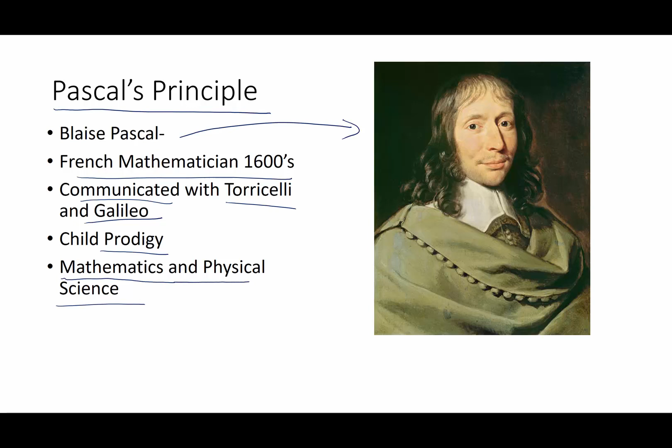Pascal was a child prodigy. He was so good at mathematics, he started publishing articles and things about math when he was still a teenager. And he was so advanced that a lot of people didn't believe that someone that young could actually produce something of that high a quality. But he had, and he produced a lot of great ideas in math and the physical sciences, meaning physics and chemistry, through the ages.

So we are going to talk about one idea of Pascal's, and that is the concept of Pascal's principle. Pascal's principle says this, and put a star by this, make sure you know this. The pressure applied to a fluid is evenly transmitted to every point within that fluid. Now, what does that mean?

That means that, let's say you have got a water balloon or something like this. If you squeeze on that balloon and apply pressure to that balloon, it is going to increase the pressure on every single point within that balloon, even the points that are far away from where you're actually squeezing. That's Pascal's principle. And there are lots and lots of applications of this, and we'll go into a few in a few minutes.

But first I want to describe a demonstration that was theoretically done by Pascal back in the 1600s. Some historians say this never happened. Some historians say it did happen. Either way, it's a brilliant story about science, so I'm going to repeat it. And it goes like this.

Pascal, like all scientists, had to have a way of funding his experiments. And so Pascal was being funded by the King of France. And every once in a while, Pascal had to show off a little bit. He had to prove to the King of France that what he was doing was worth the king's money. So Pascal set up a demonstration of his principle of transmitted pressure. He took a wine barrel, and inside of it, he inserted a long tube.

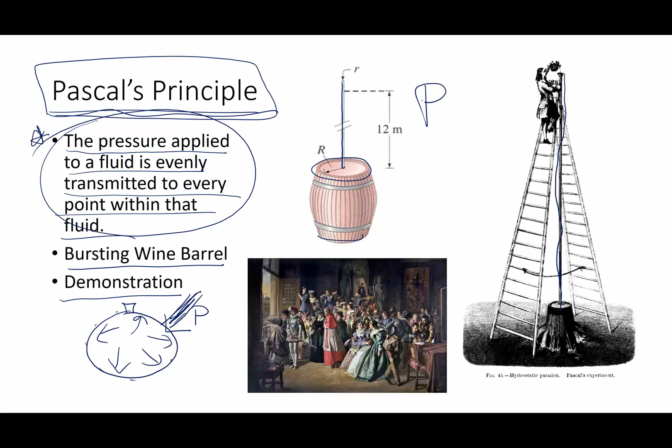Now, Pascal understood that pressure is related to the height of a column of fluid. So there's a direct relationship between pressure and height. So Pascal has this long tube, and then he has 1 additional cup of water. So he called up the king and all the courtiers to come around, and Pascal said, I am going to pour this 1 cup of water down this tube, and it's going to make this entire wine barrel burst.

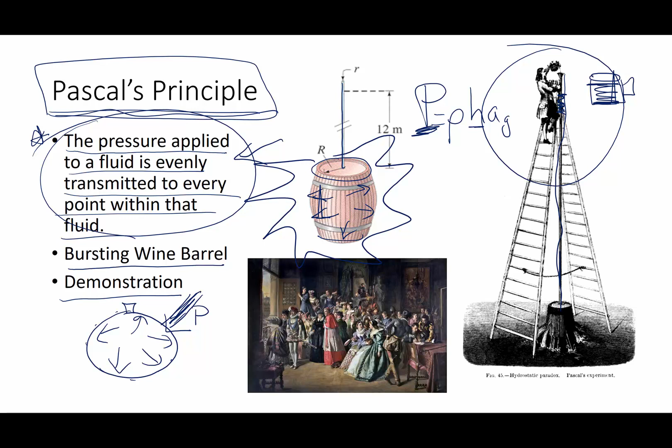And so he poured the extra water in there. It raised the column of water just the necessary amount. The pressure got big enough, and that pressure was evenly distributed to every point inside of the wine barrel. According to Pascal's principle, the wine barrel exploded. Everybody was amazed, clapped, and Pascal was the hero of the day. But that is a brilliant story.

At the end of this video, I'm going to ask you to watch 2 or 3 other videos of some of these really demonstrated in real life. So please watch those.

Here's another example of Pascal's principle. And these are your car brakes. Now, inside of the brake system on your automobile, you actually have fluid. You have brake fluid. It's a weird angle, sorry, but when you push down on the brake pedal with your foot, what happens is this pushes on a cylinder, and when that cylinder pushes on the brake fluid, according to Pascal's principle, the pressure is transmitted everywhere within that fluid.

So by pushing on 1 pedal here, you can actually apply a push to all these different areas within the car and make the brakes actually close so that your car will stop. Now, some of you have heard the concept of bleeding brakes. Now, if you have an air bubble somewhere in a brake line, what happens is liquids are not compressible. Gases are compressible.

If you have a cylinder in an automobile engine or something like that, and you have gas molecules, and you compress that cylinder and push it further down, what happens is the gas molecules become very close together and their density increases dramatically. That doesn't happen for liquids. So if you apply pressure to a liquid, the force goes in all directions.

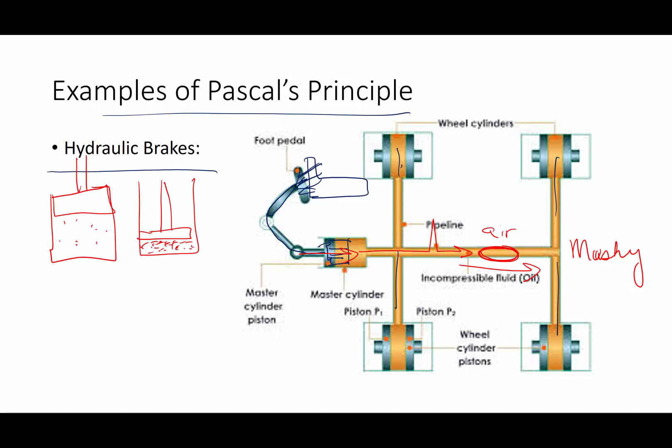Well, if you have pressure coming through a fluid and all of a sudden you have air, what happens is the pressure stops being transmitted. What happens in your car? Your brakes are going to feel mushy. And that's in the best case scenario. The worst case scenario is you're going to lose your brakes and you're not going to be able to stop, which would be very, very dangerous. So when people talk about bleeding brakes, what they're talking about is actually removing the air bubble and replacing the entire line with brake fluid.

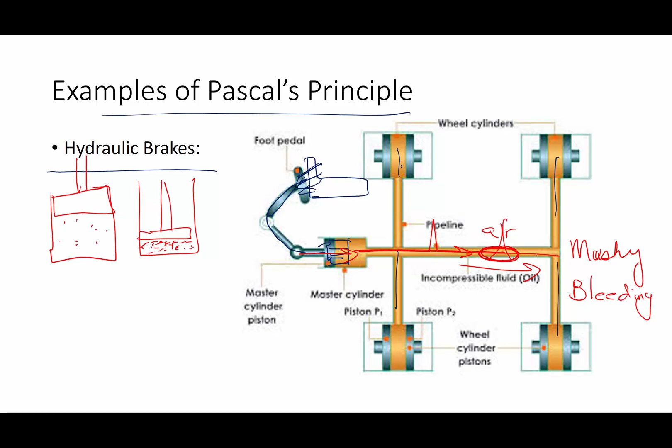Other examples of Pascal's principle. One is the famous beer bottle and mallet. So if you take a beer bottle, pop bottle, the cap has to be removed. And some people trying to be, I don't know, silly, will take one bottle, and if this bottle is open, they will hit one bottle with another and go bang. Well, if this bottle happens to be full of a carbonated beverage, you end up with a shower of carbonated beverage all over the place. And as I have had many a student tell me, that is a waste of perfectly good beer. So you don't want to do that.

But after your bottle is empty, and the top, of course, is removed, if you fill this full of plain old water, something not carbonated, when I do this, I like doing it with a rubber mallet. And if you try this at home, please make sure you're wearing safety glasses. Make sure you are wearing gloves, because you are going to get some sharp glass out of this. But if you fill this quite a ways towards the top with water, smack it, a good smack with a rubber mallet, not a hammer, but a rubber mallet. Some people can do it with their hand.

What happens is, because liquids are non-compressible, the push or the force goes all the way through the bottle, and because it hits the bottom, rebounds, and then goes back down and hits, it actually takes the bottom of the bottle and pushes it clean away. The force is transmitted through the bottle. Force transmitted through a fluid, that is hydraulics, and it is a fun and simple little demonstration of hydraulics.

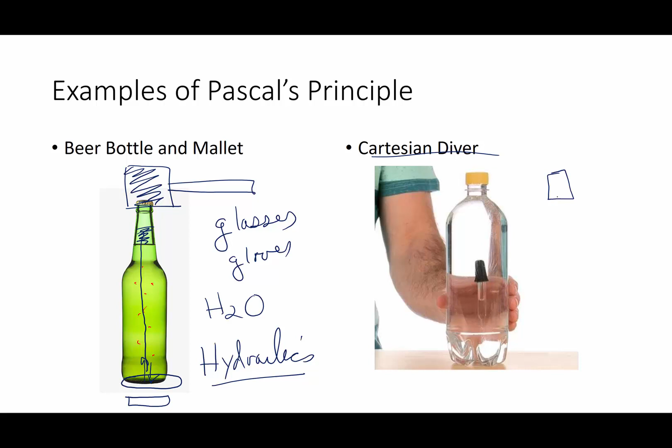Another example of Pascal's principle is a Cartesian diver. The simplest example is a 2-liter pop bottle with a little eyedropper in it. Put your little eyedropper into the bottle with just a little bit of water in it, and here's how it works. If you push on the bottle, now the bottle is full of water, the push via Pascal's principle is transmitted everywhere in the bottle, including up inside of the little eyedropper.

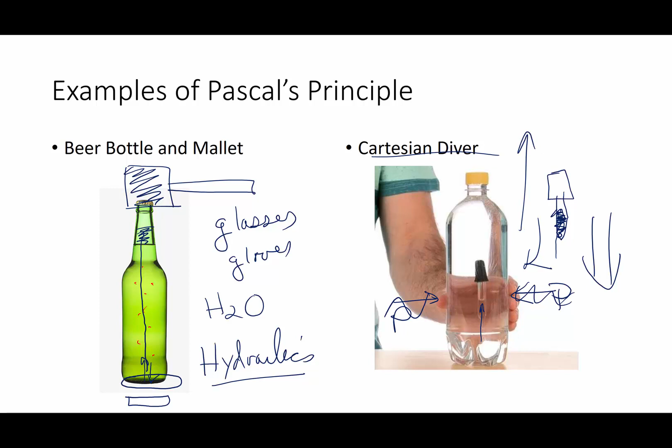So when the pressure goes up in here, more water flows up in here. This becomes more dense and sinks. When you release the pressure, the water flows back out again, and the little eyedropper pops to the top. Really, really fun little thing, but you need a 2-liter bottle and an eyedropper.

Okay, let's talk about blood pressure. Lots of cool things in fluids with blood pressure. Question: why do they take your blood pressure around your upper arm? Why not around your wrist? Why not around your ankle? Why the heck do they do it around your upper arm? Well, remember that the pressure in a column of fluid is related to the height of the column of fluid. In medicine, they're most interested in the pressure in your heart, and your upper arm is about the same altitude as your heart. That's why they want to take the blood pressure at that location.

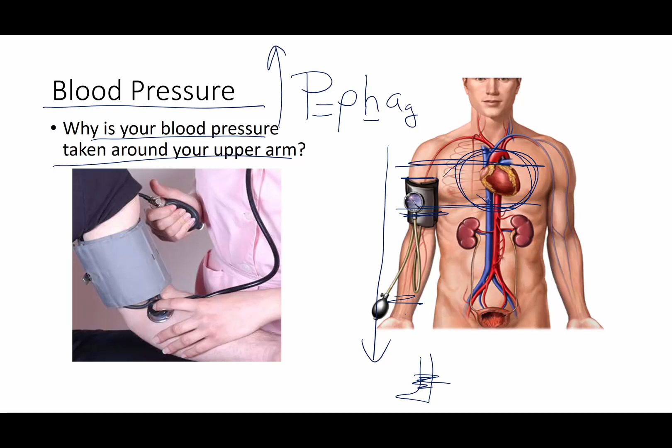If they take it somewhere lower, like your wrist or your ankle, the higher the column of fluid, the more blood pushing down on those lower extremities, the bigger your pressure is going to be. So here's another blood pressure question. When you go to the doctor and they are going to take your blood pressure, they always ask you to uncross your legs.

You don't want them crossed at the knee. You don't want them crossed at the ankle. So why is that? Well, that is back to Pascal's principle. Because of the fact that if you are pushing one artery or veins on another set of arteries and veins, you are increasing the pressure. And if you increase the pressure in a column of fluid or a body of fluid, and that includes your whole vascular arterial system, the pressure is going to go up everywhere, including the blood pressure in your heart. So if you cross your legs, you are going to have a higher blood pressure reading.

I had a student a couple years back come to me and say, how do they take the blood pressure of a patient that does not have arms? And I didn't have an answer to that. So I asked one of my colleagues who happens to be a nursing instructor, and the answer is brilliant, and it's really, really fabulous science. And here's what they do.

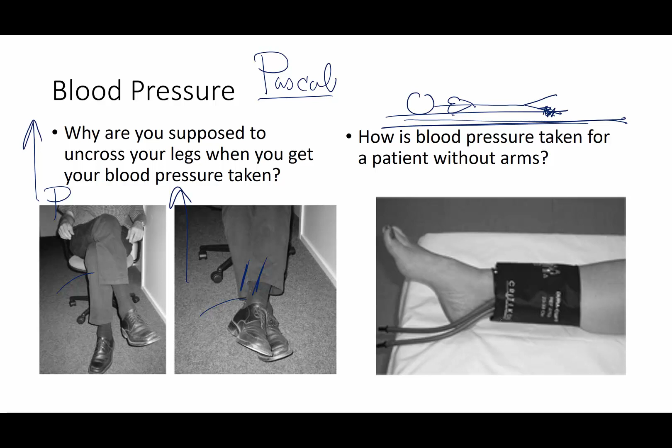They ask the patient to lay down, and they put the blood pressure cuff around the ankle. Well, as long as everything is at the same altitude, if the heart is at the same altitude as the ankle, then the blood pressure readings will be the same. And it is a perfectly scientifically accurate and logical way to do that.

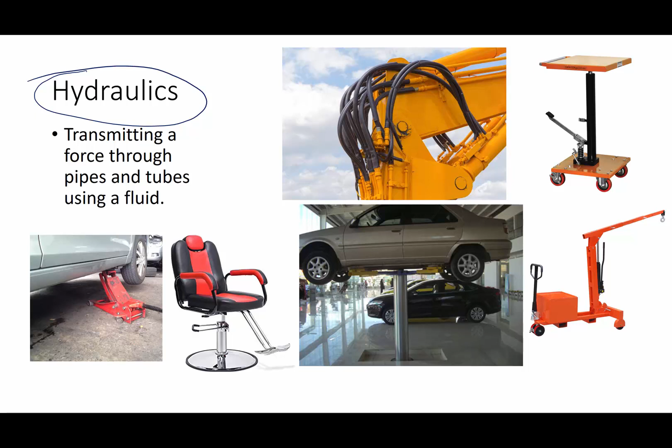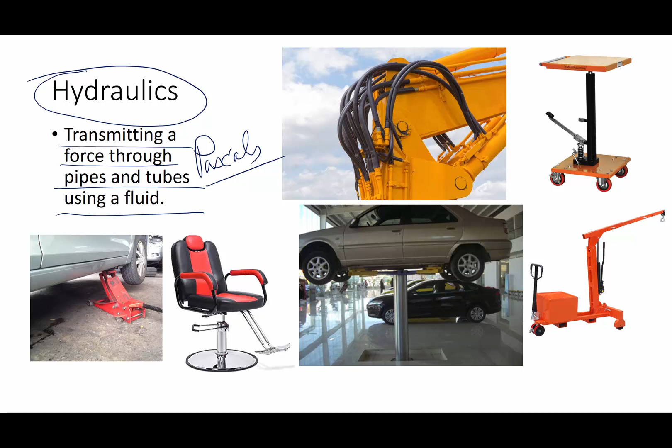So what we've been talking about in some of these systems is the concept of hydraulics. Now, hydraulics is the transmission of a force through pipes and tubes using a fluid. And basically, they all function using Pascal's principle. Lots of hydraulic systems in big diggers and dozers and things like this because there are so many forces involved. Human beings can't manhandle those around, so they are full of hydraulic forces.

Hydraulic lifts, if you go to the garage and they're going to put your car on a lift to change oil or something like that, you're going to have a hydraulic lift. Somewhere as simple as when you go and get your hair cut, the cosmetologist or barber is going to be back here pumping on the little lever to get your chair to rise or lower to the right altitude for them to cut your hair. That actually is a hydraulic system.

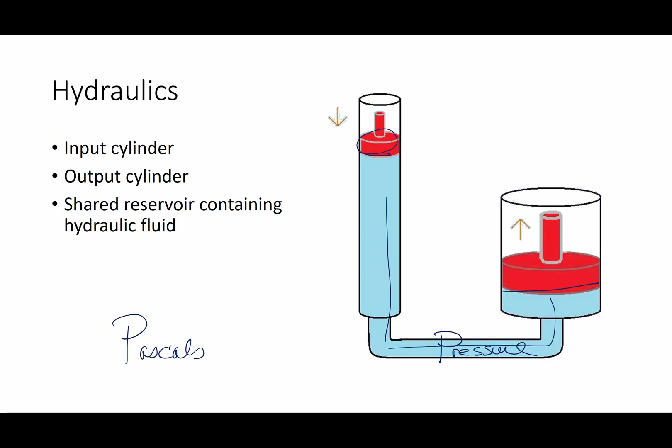So here's how hydraulic systems work. They work, again, because of this concept of Pascal's principle. So there is a shared chamber of fluid, and the pressure is going to be the same everywhere within that chamber. There is an input cylinder. Typically, the input cylinder is going to be relatively small. And then there is an output cylinder, typically relatively large diameter. And because they share one reservoir of pressure, the pressure is going to be the same for both.

So here's how this works. Pressure is force divided by area. So the cross-sectional area of this cylinder, divided into the force that must be applied here, is going to be equal to the cross-sectional area of this cylinder and the force that is the output here. And because pressure is the same, this is going to equal that. And that is pretty simple stuff. So the mathematics for that is also pretty simple.

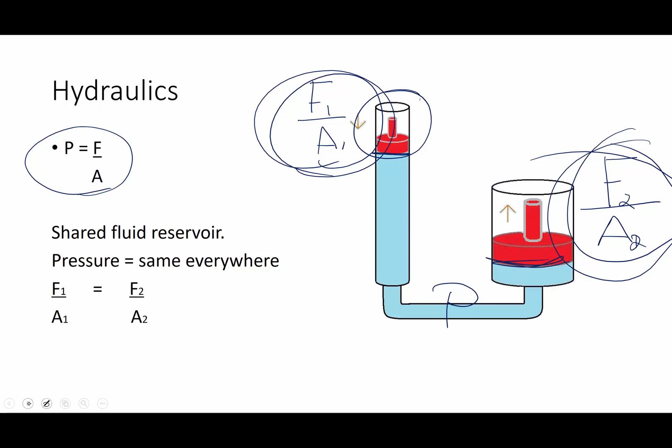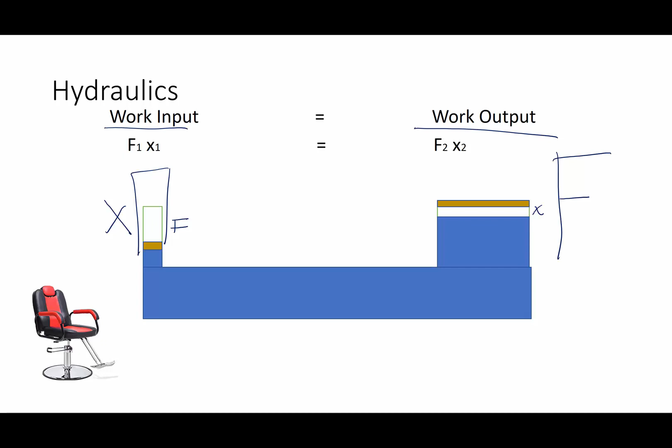When I was first learning about hydraulics, I said to myself, it looks like it violates the law of conservation of energy, but it doesn't, because the work input equals the work output. The input cylinder, you have a small amount of force, but you have to move it through a large distance, x. Output, you get a big force output, but it's moved through a very small x. So the total work, force times displacement, of the two are the same.

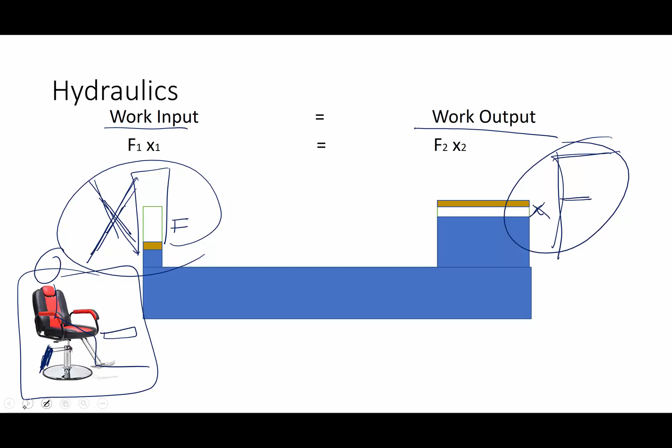And I always go back to the getting my hair cut example because it's the one that I make sense out of. If I'm sitting in a chair to get my hair cut, the lady who's cutting my hair, she's pumping like a crazy person back here, and she has to pump maybe 10 times to get my hiney to move like an inch because she has to put in a little force but over a big distance to move all of me a very, very small amount. But that is Pascal's principle.